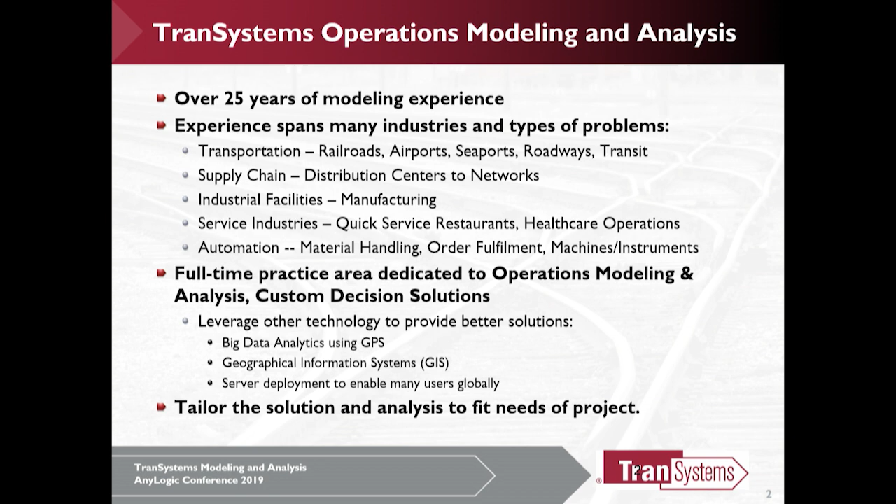But what we focus on in our practice is to maybe use those tools when they make sense, and a lot of times they do. But then there's a lot of projects that really don't fit the bandwidth of some of these other tools, especially when you get into multimodal operations or transportation systems that have to integrate processes and things like that.

So we use AnyLogic for a lot of those types of problems, and we'll talk about a few of them we've done in the airport over the years. Worked with a lot of different industries, ports, railroads, industries. These are just a small fraction of them.

Just talking about large transportation facilities like airports or ports or facilities like railroad corridors. They really do require a lot of planning.

There's multiple phases that you go along in some of these large projects. From very early on, you do some very preliminary feasibility analyses. Then when you move on, you get into more detailed comparisons.

And the one thing that's a challenge with a lot of these projects is that there's a lot of stakeholders. You've got multiple operators that are even competitors of each other. So there's a natural kind of concerns on these stakeholders to make sure that this thing's facility is going to operate properly.

You even have to work with an airport authority that has a budget and things like that have to be managed. You have a multimodal system where you have different types of things. You have to integrate trains, vehicles, buses, people, all kinds of things. So that becomes a challenge.

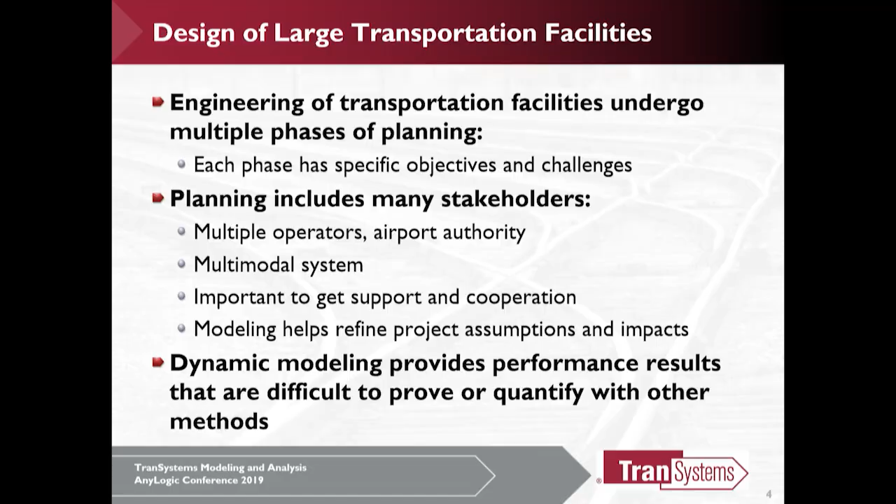One thing we've learned from working inside of an architecture and engineering firm, the engineers are very good at coming up with designs. They're very eager to look at the lay of the land and the footprint of a site and come up with a design that meets the general objectives of a particular project.

But there's a lot of things that those kind of designs don't necessarily incorporate. Some key questions, whether can the volume or service targets of a facility be met? It's very hard to measure that in just a drawing.

Is the design cost-effective? Does it really produce what we need in the most cost-effective way? Sometimes that's not necessarily the case. You can test multiple alternatives and find that maybe another solution, or a trade-off of infrastructure and policy or rules, can possibly give you that.

That's the kind of theme that we have, is that we use modeling analysis as part of the engineering process so that we can iterate and come up with a productive and useful solution. It's a very interesting process to go through, especially with the airports that I'm going to show.

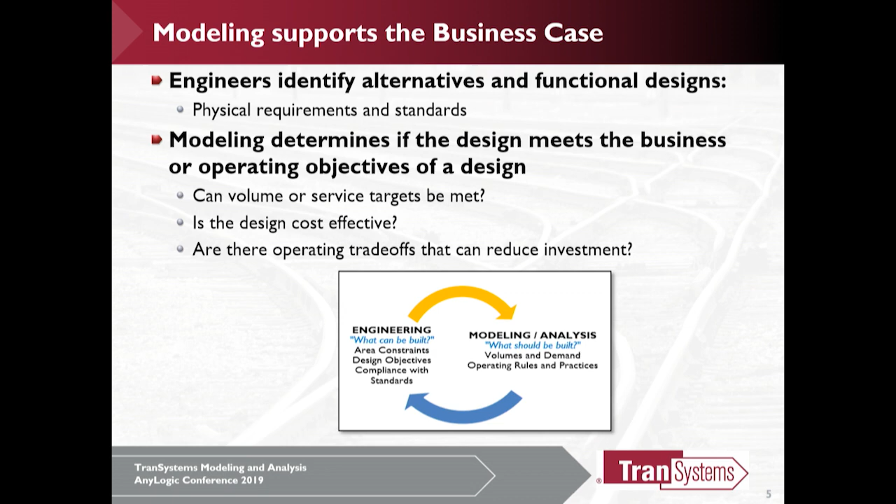We've been finding in the transportation industry that we can use modeling for pretty much everything across the timeline of a project, all the way from just very initial visualization and feasibility, where you can do a model very rapidly and say, does it even come close to meeting our objectives? Sometimes you find out you have to redesign it right there.

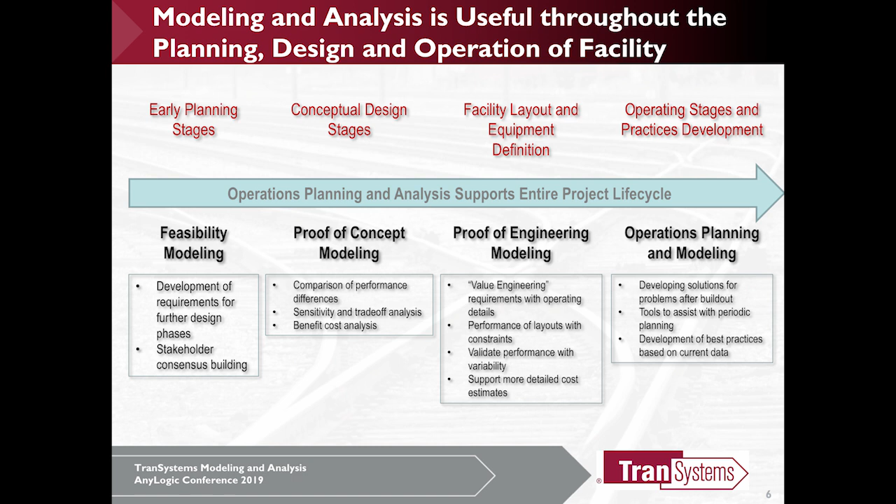But most commonly we get involved with proof of concept or proof of engineering modeling, where some work has already been done, and now we need to confirm and compare different alternatives, or possibly do what is called in the architecture field value engineering, where you may have an initial design, but find that putting it all together with the costs, it needs to be reduced, and you try to figure out, is there a way we can do more with less?

So those are the common themes that we get involved with, but we've worked throughout the space here.

First, I'm going to talk a little bit about consolidated rental car facilities. They're called CONRACs in the industry, and I'm sure many of you who have rented cars have been in one of these facilities. They're becoming more and more popular at large airports, and we've worked with O'Hare, LAX, San Antonio, Phoenix. So these are just some of the big airports we've done this for.

Basically what they are, especially like at LAX which is the one going on right now, is they take all these rental car operations that are scattered around the airport and bring them into a single giant structure that uses common bus systems and all that kind of thing, so it makes the valuable real estate around an airport more usable, so they justify themselves quite nicely in that regard.

But they're more than just a parking structure, which you may think they are, giant parking structures. They're really kind of almost like little factories where you have multiple agencies in these facilities. You have brands that each have their own peak demands.

For example, some brands are more focused on leisure travelers and some are more focused on the business traveler, so they all have their peaks. The industry has evolved so that some of the bigger brands actually have leisure and business brands, and they use the cars between their own little brands to keep their fleet fluid and get the maximum benefit of all the cars they own.

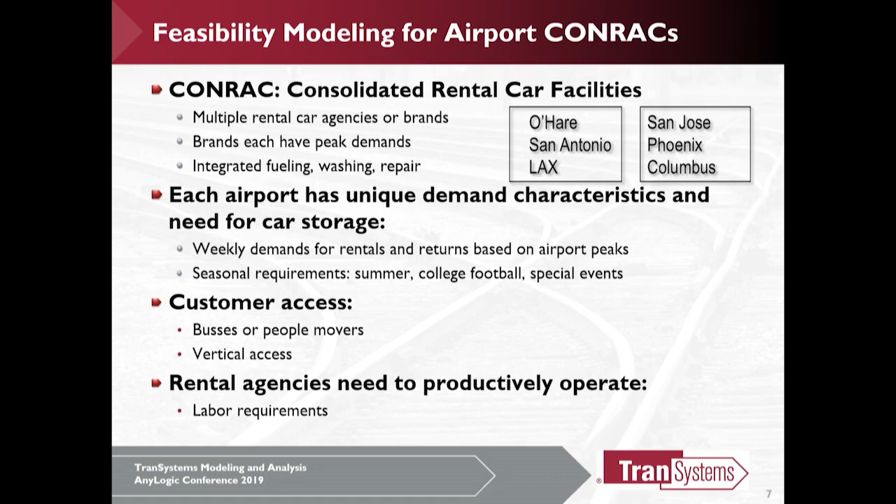So anyway, the rental car agencies are very concerned that they also don't have to spend a lot of labor to operate these facilities. They don't want their drivers or their labor unnecessarily driving too many miles or spending too much time, and that's a concern so they can maintain a productive operation.

So here I'm going to show the first example for a CONRAC, which is what we call sizing the deck. That's the big thing.

The rental car companies want to have a good mix of cars so the customer can see all the different cars they have, but they also want to be able to have enough space to deal with the surges of returns that go on.

So we're looking at how well the deck supports the peak demands, because the rental car agencies do have off-site lots, and they really don't want to be going off-site. They want to operate pretty much within the confines of this particular facility.

So the basic question the different stakeholders, the rental car agencies, are interested in is: is there enough space for me to operate within the footprint of this building? Am I going to have to be running around all over town getting cars to go back and forth? So they're really concerned about that.

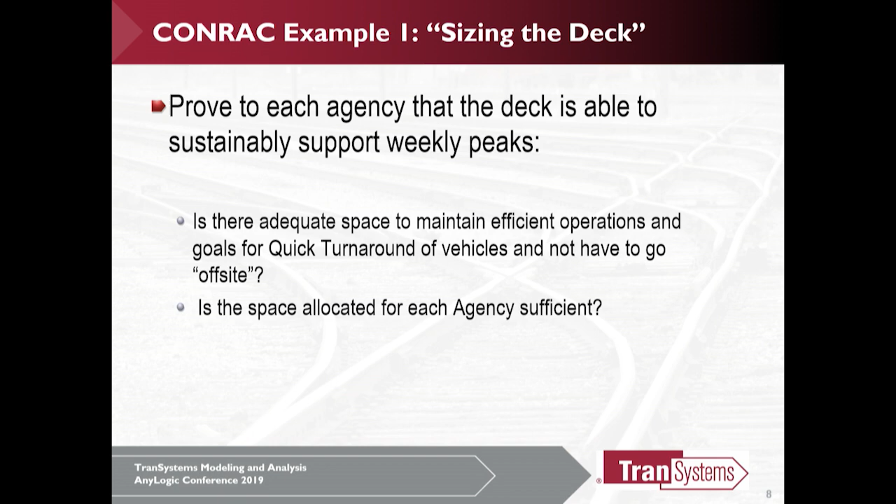So what we do is prove this with some modeling in AnyLogic. Some of the inputs we have are the arrival patterns that customers have, and there are a lot of studies done in terms of when these customers come before their flights and so forth. We have daily peaks, hourly peaks, and processing times for the different things needed to get a car ready and turned around from return back to rental. We have staffing, equipment, and some of the normal things you have in a model.

But we provide time-based outputs so that we can get the utilization of staff at every step, how well the facilities are used, and certain metrics so that the different stakeholders can see that this is going to be a feasible operation for them, and agree on the project so it can be moved forward.

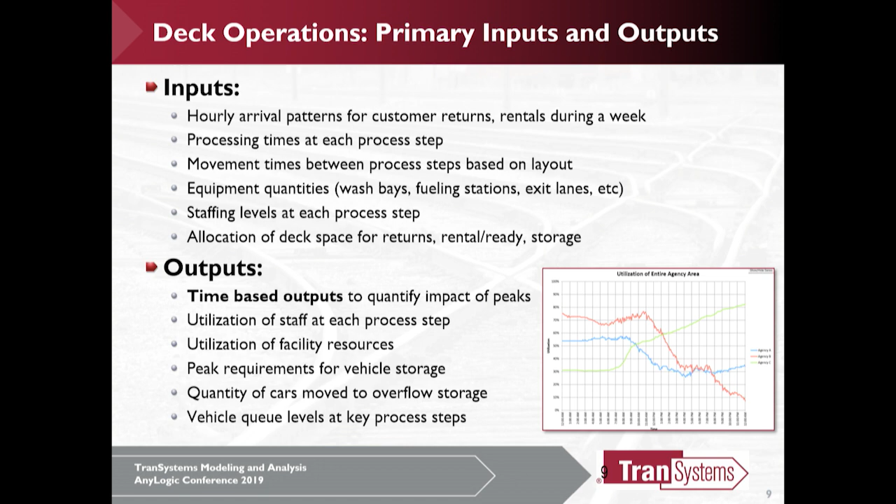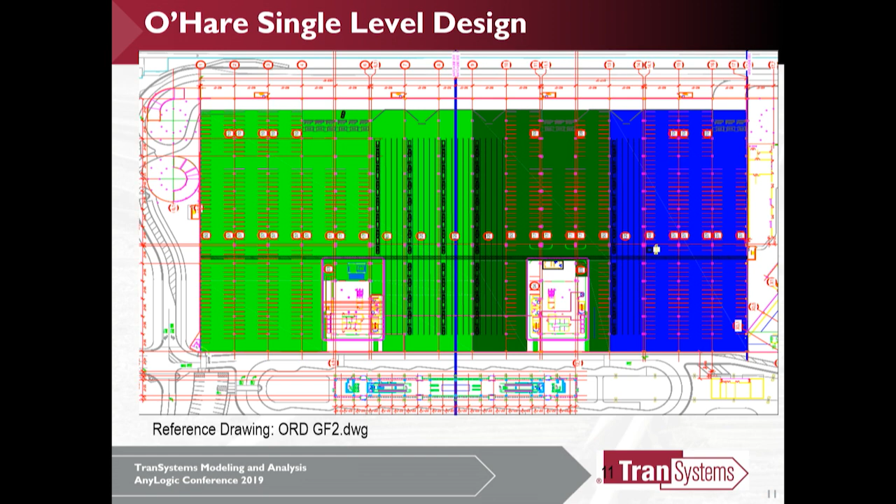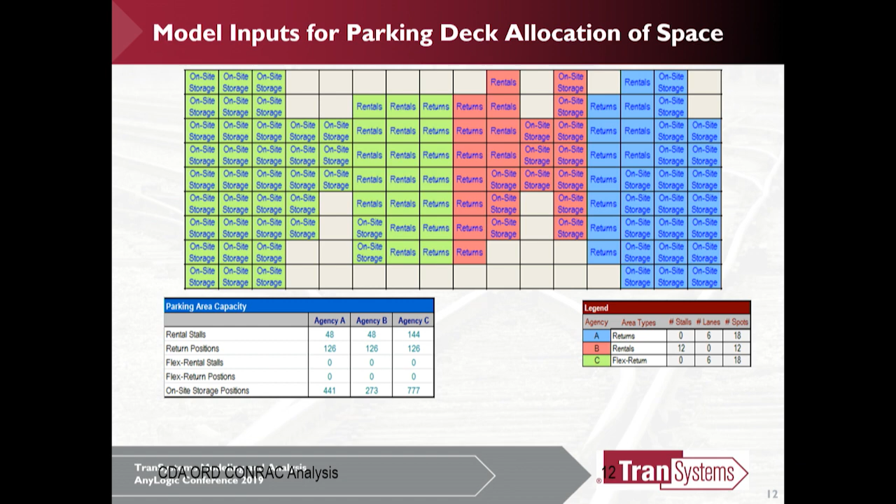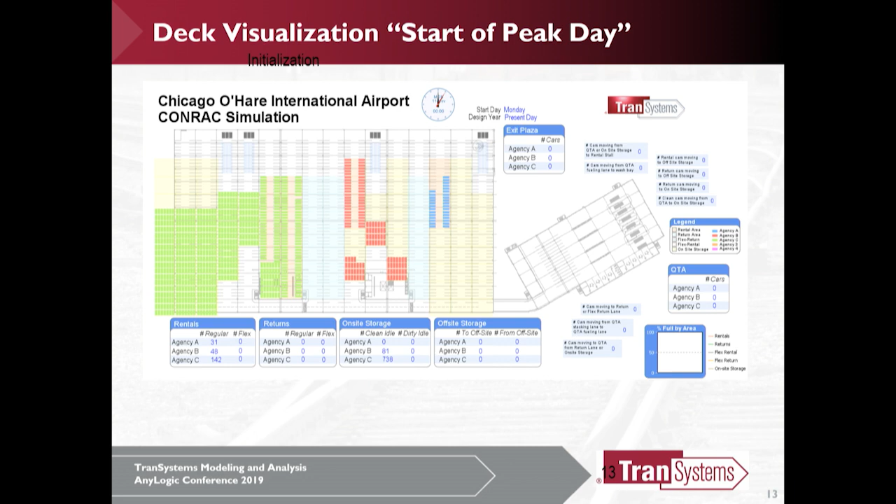It shows that their parking decks are, like one of the rental car agencies, their parking deck is pretty full, the other ones are not. And that's how they would start this peak day, by planning their cars in this way.

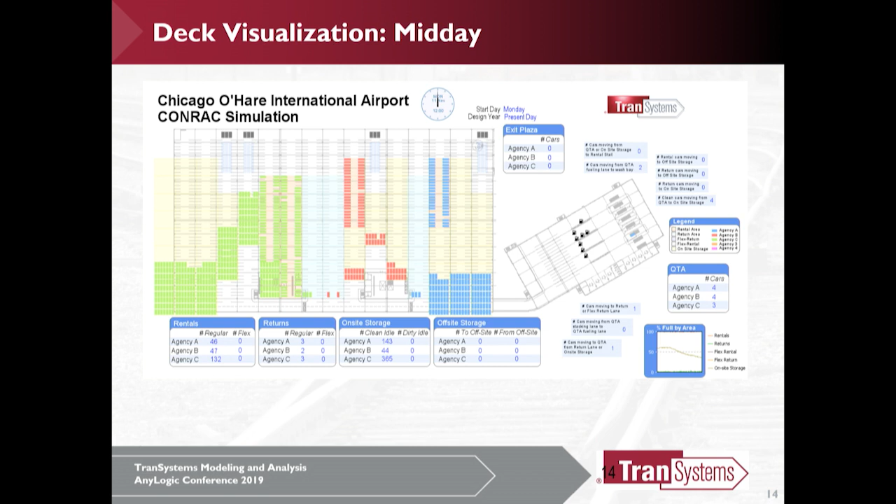And at midday, you can kind of see the green agency that a lot of their cars have been rented because that's a peak rental day for them. And the other ones, actually the blue is a leisure brand, it looks like, that had some of the returns happening. So we can help them visualize, okay, this is what your facility is going to look like in the middle of the day.

And then at night, you can see that after their peak is over, the green is pretty much empty of cars, and then the other facility is starting to build up.

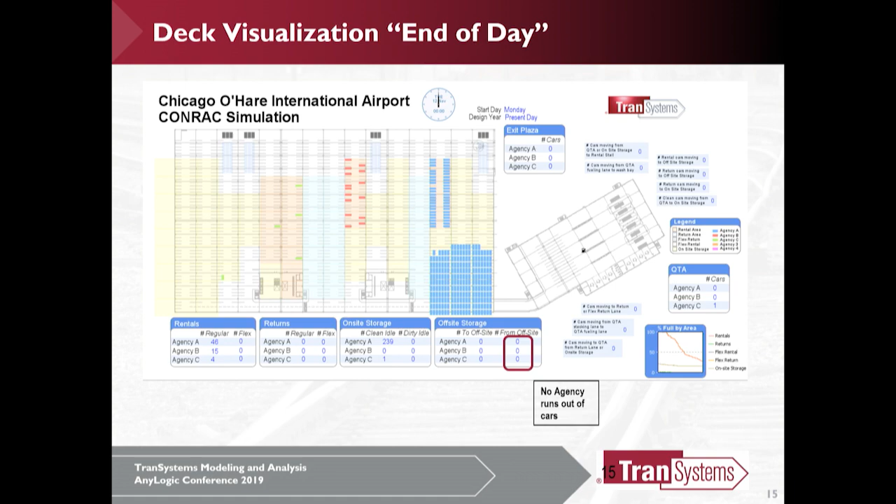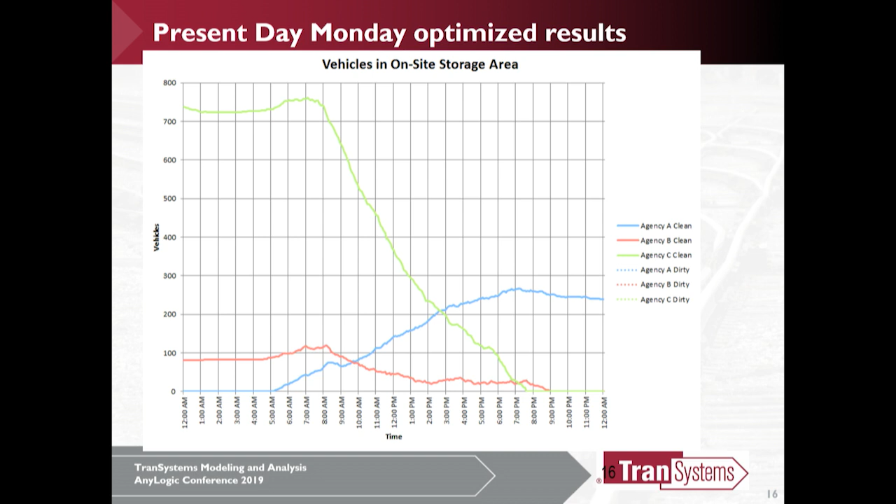This visualization helps them understand what their typical day is going to be like, and helps them agree on and understand how much work they're going to have to do to maintain operations on these decks. Here's an example of the outputs, so you can see how the different agencies have inventory of cars and how they bleed down, and how that green one, if they had to go much longer, they would probably have to start getting off-site cars. So it helps them understand if they're going to have enough space.

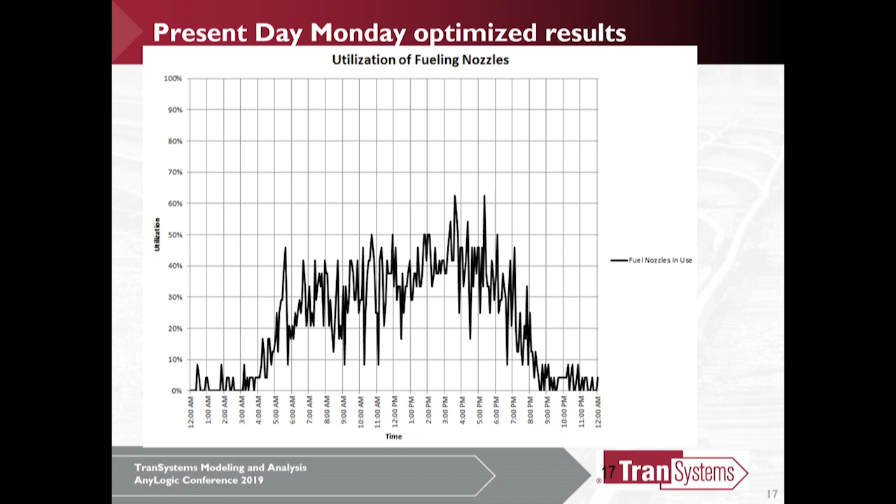Then we get into some of the quick turnaround facilities in terms of fueling, and we can show how many fueling nozzles they're going to need to maintain the turnaround of the cars, because that's really important to them as well. And then they also have the washing. So all these things help size how much capacity you need to support these operations.

LAX is another CONRAC we got into, and this project is on the order of $1 billion, which sounds like a really big investment, and it is, but it's justified because LAX has all their rental car companies spread across that area, and they can justify it by the amount of space they're going to be able to save by having it in a single facility.

We got involved with LAX in a number of ways I'm not going to show examples of, but we worked through understanding whether it should be more vertical or horizontally arranged, or more vertical, to help with the fire issues. So we helped understand the differences between those kinds of arrangements, how they extend the number of hours it takes to operate and so forth. We got involved in all kinds of iterations.

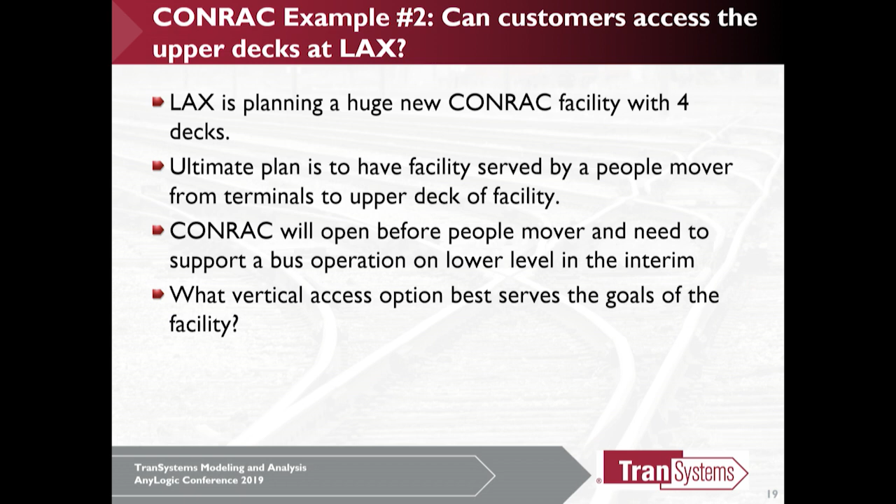One thing that did come up is that ultimately this new rental car facility is going to have a people mover that intersects with one of the upper decks. But unfortunately, with project timing, the rental car facility is going to be done before that people mover is finished. So they have to have an operation with buses that come and deliver people to the facility, and vertical access to take them from a ground bus floor level all the way up to the upper decks where the rental car companies are.

So there was quite a bit of concern that we'd have enough space for all these buses in terms of the peaks with the morning and international and domestic arrivals. We looked at scenarios to understand how the operation changes, or how the facility can handle those particular scenarios. So we used the Pedestrian library to...

There's an animation in there that shows the buses coming in, and we were looking at making sure there was enough bus slot capacity.

We also wanted to test whether an elevator concept would be sufficient for the vertical access. There was first interest in doing escalators, which we modeled before that, and that worked great, but they saw the cost of it and the fire implications, so they said they really wanted to try elevators instead. So we then tested elevators to make sure they maintained fluid operation, and we have statistics showing how busy they are and how much accumulation occurs between the elevators.

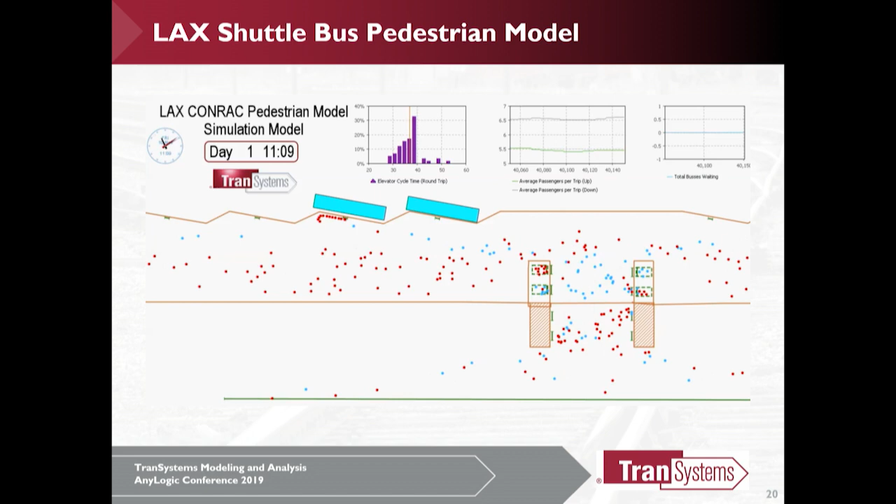Then here's a final example for an airport. This is not a consolidated rental car facility, this is LaGuardia Airport, which has a Southwest terminal there that's all Southwest, relatively new. And they wanted to add a new Air Canada plane into that facility at a certain time.

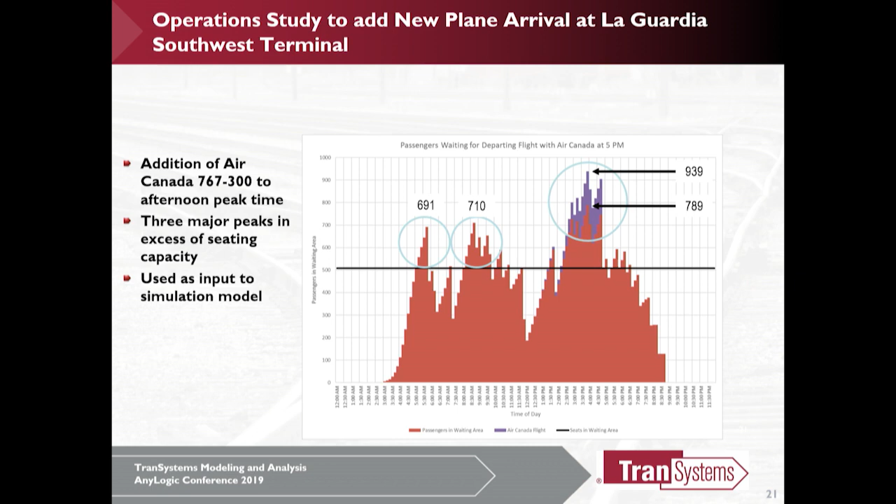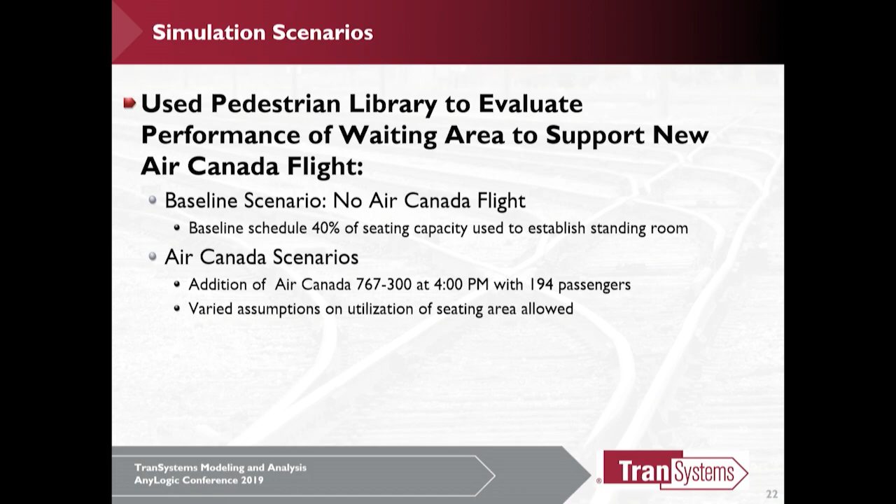So we used the pedestrian library, and that was a really good application for this tool in terms of seeing how the effects of all these waiting areas impact the terminal. We started with a baseline with no Air Canada flight to see how the system operates, and then we looked at different assumptions. That's what's nice about modeling - there's all kinds of assumptions you can test, and once you have a model built, you can really try those and see how sensitive the particular design is to that.

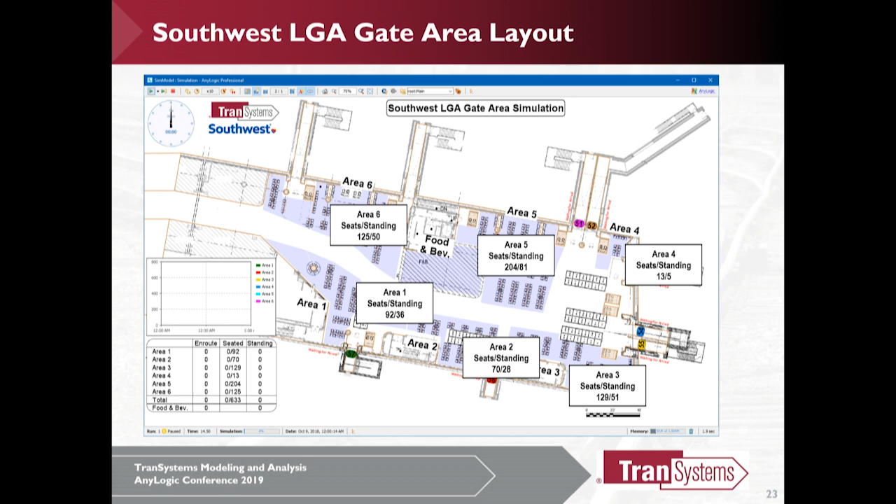And here is the LaGuardia gate area. We modeled all the areas in that particular terminal. There's a general goal to have people waiting at their gate be in the area where they normally sit, and that was part of what we wanted to test - to see how far people would have to wait for their plane. So we put that in there.

Did that go back again? I didn't wait long enough - that animates. Okay, I guess there's an animation. Well, I think the animation's actually at the end, I'm sorry.

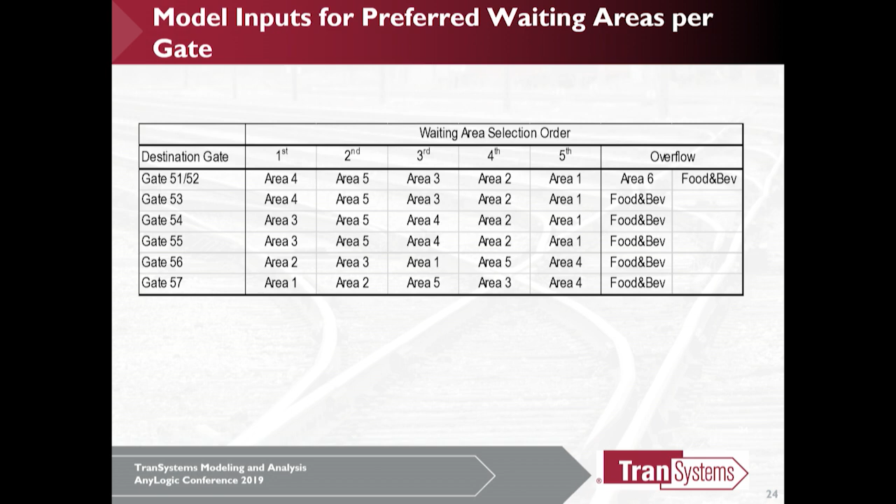Okay, here's the different table inputs we put in here. We looked at just the preference for the different gates to use their waiting areas, so we could see how far people would have to wait away from their gates. And then we had overflow at the food and beverage area if nobody was able to find a spot.

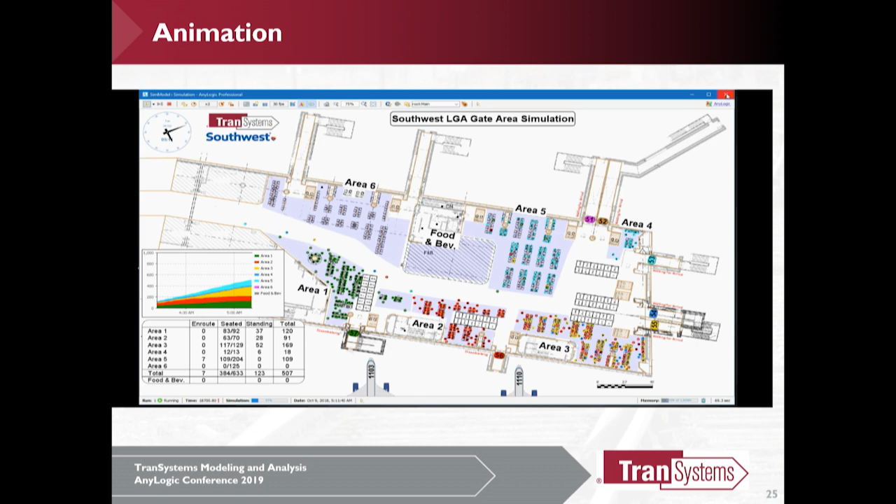This is one of the animation screens, and it shows how we have the planes coming in, passengers coming off the planes, and passengers waiting. So here, with the baseline, there's the old static model we had, and you can see the results when you have the model results. It doesn't show anything totally different, but it does smooth out some of the peaks a bit, and it shows you where people are actually waiting.

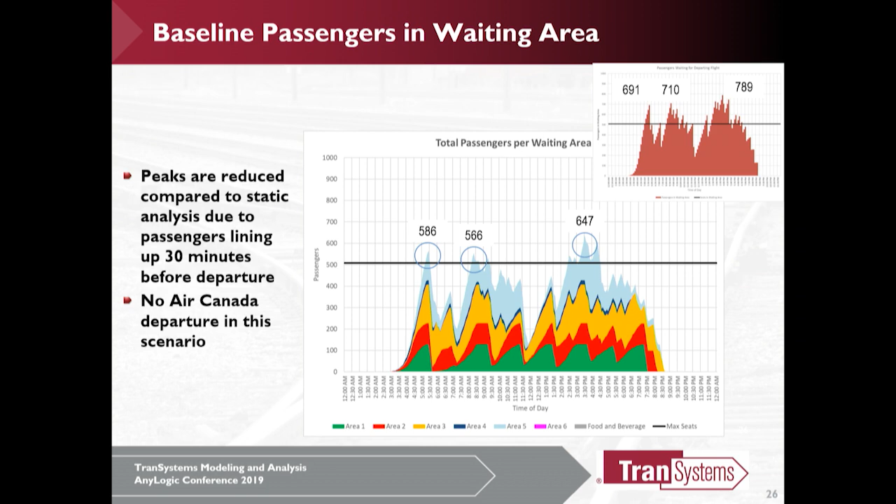This is the scenario without the Air Canada flight. We found that at 8:22, there's no overflow used - it's a pretty stable situation. But at 3 in the afternoon, you can start to see it getting a lot more heavily utilized, with a lot more mixing of passengers at the different areas for the different gates.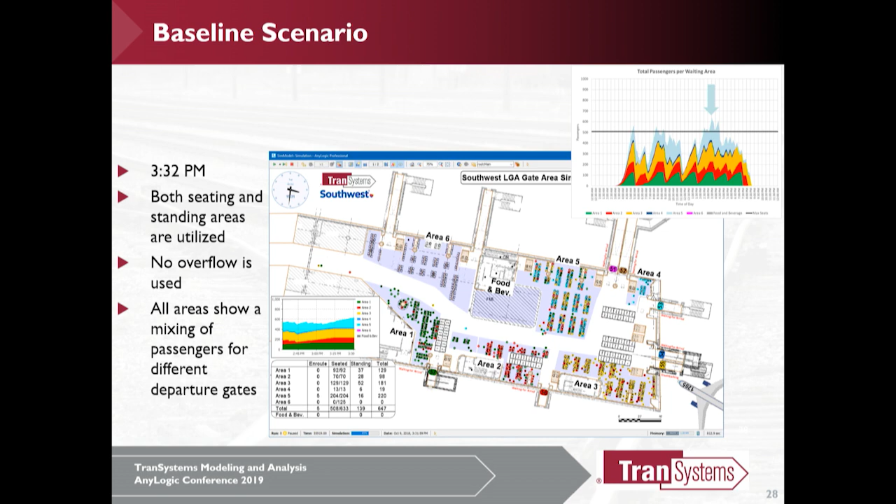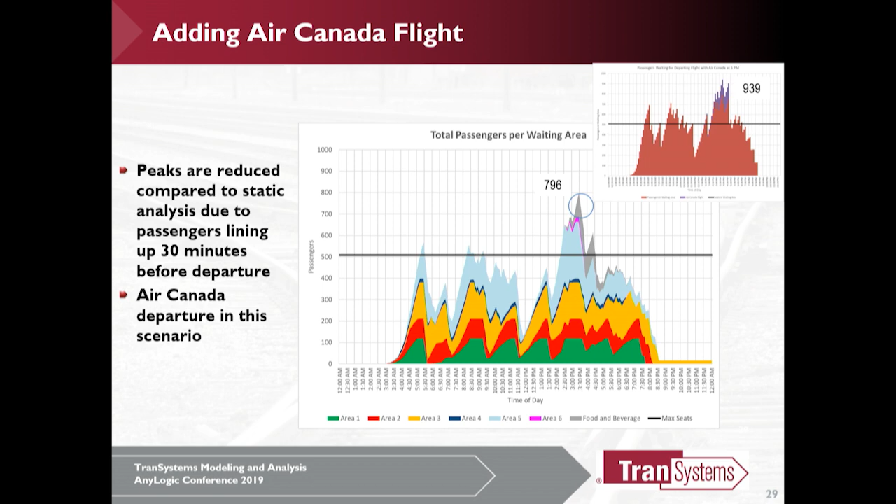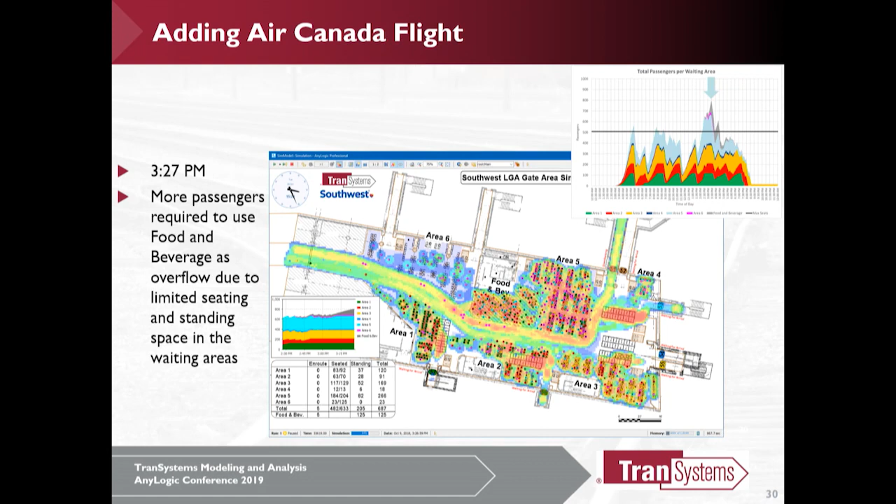And then when you add the Air Canada flight at this peak time, which is already a problem, this shows what happens. This is the animation of that with the outputs from the pedestrian library, and you can see how busy some of these areas get and how much overflow is needed. This became particularly useful to show the operators of this terminal what adding this flight is really going to do to passengers in this area, and how far they're going to have to move into the terminal to wait for their flights.

That pretty much concludes some of our applications for airports. We've done quite a few things for airports, but this gave you a little variety of some of the things we get into.

Yeah, I just had a question about how you go about validating or getting buy-in for facilities that don't exist yet, like the car rental in LAX.

Yeah, that's a good question. Well, we go through all of our assumptions that we put in there. We put together presentations of our assumptions and our data, and we get agreement with the stakeholders that these are good numbers. We might show them some metrics on typical labor usage and things like that, to make sure they're in line with what they'd expect from their experience. So it's a bit of assumptions, and just checking whether this makes sense from your knowledge of the operation. That's usually what we wind up having to do. Thanks. Sure.